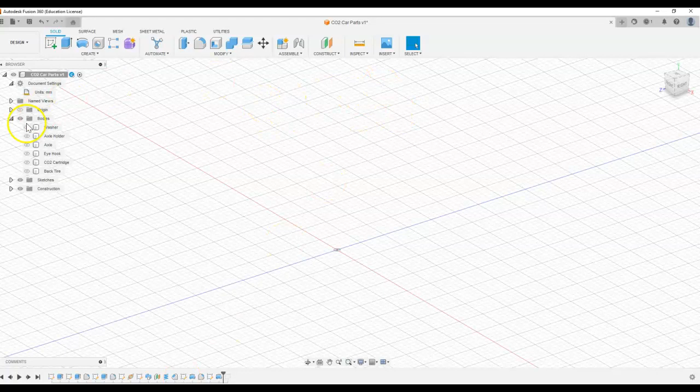So let's jump into Fusion and see how this works. If I turn my axle back on, really, because I'm not doing this with Revolve, I'll want to ensure my tire works by drawing on the front. I'm going to turn that back off, but I just wanted to make things make sense.

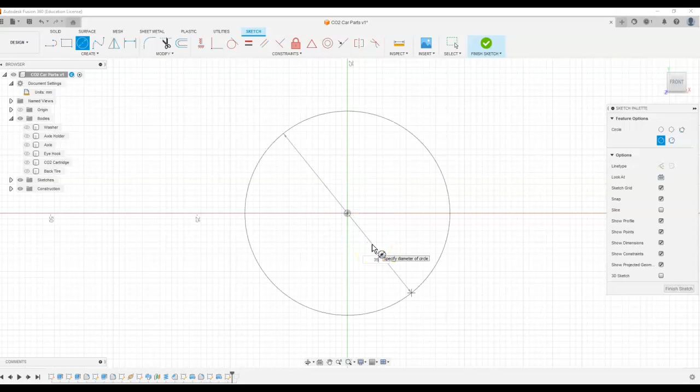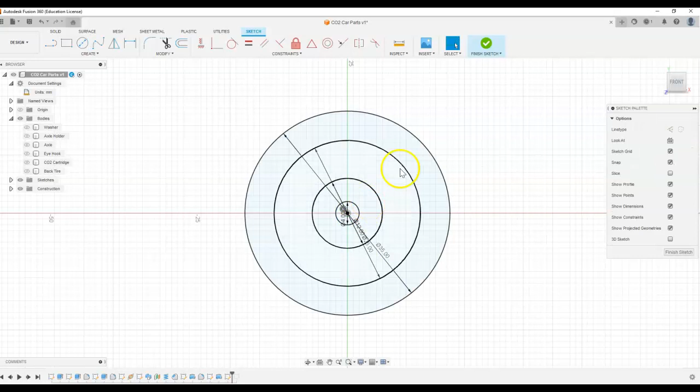To me, it makes the most sense to start with our biggest diameter. I'm going to use the shortcut C to get to our second largest, which is 25. I'll use the shortcut C to bring out 12 millimeters, and then follow up with one more at 4 millimeters. All of these concentric circles may look confusing, but if you look at the drawing, it's 35, 25, 12, 4. The only one I'm not doing yet is the 3, and that'll make sense in a moment.

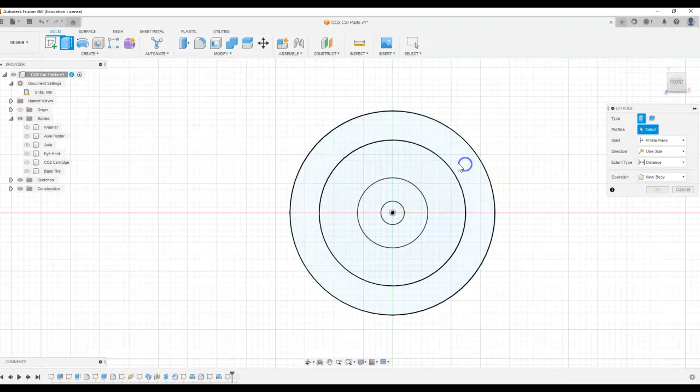All right, so how thick is this, right? If you look, we have a 5 millimeter thickness. So I'm going to pop out this piece and this piece only for right now, and we're going to do 5 millimeters. Let me look at this isometrically so you can see exactly what I'm talking about.

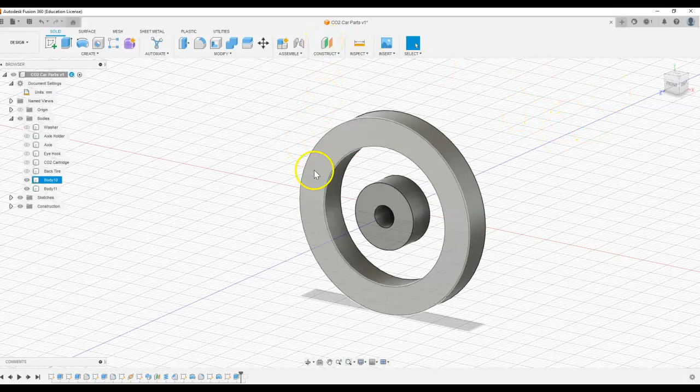So basically, the really tricky part about this wheel is the fact that we're going to need to draw 1 millimeter inside this. If we think about the sketch plane, if we write negative 1 millimeter, now we're drawing inside without actually needing to cut the part in half. That's one of the benefits of CAD, right?

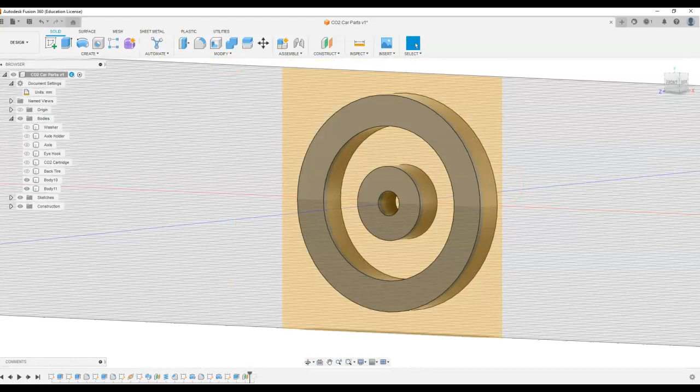So we're going to draw this piece right here, and we are going to start working on spokes. Spokes are really going to help us when we draw the support for our tire. If we look at the drawing itself, there are a few ways to do this.

I'm actually going to use a project geometry tool, and that way this piece and this piece are actually going to be connected. I may have to draw a circle later on, but if you look at the drawing dimensions, it's an angle of 35 degrees, and it says it's 5 times. That means each one of those is going to be different—there are 5 different spokes, and you'll see that every part of this is actually extruded out.

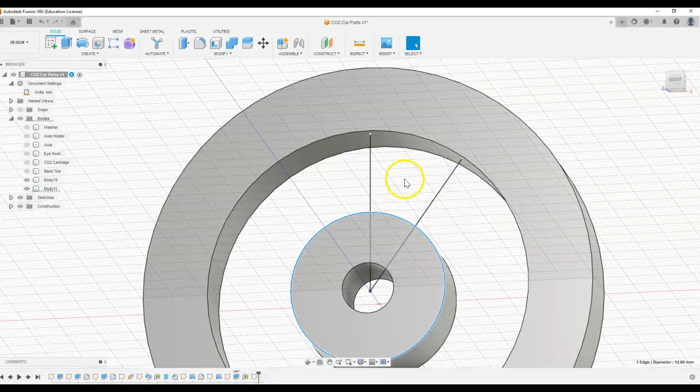So we have that part, we have that part. This is the only face that we're actually going to be popping out. So if you go to project or hit the letter P, you can actually project the same exact geometry onto this sketch. If we hit this, you'll see that I can't actually pop this piece out, right? So projection isn't perfectly working.

So if I go out here and just draw circles, the same idea is going to work. I'll have each one of those with the same dimensions. Let's check it out, see if it worked. And it does—that's great.

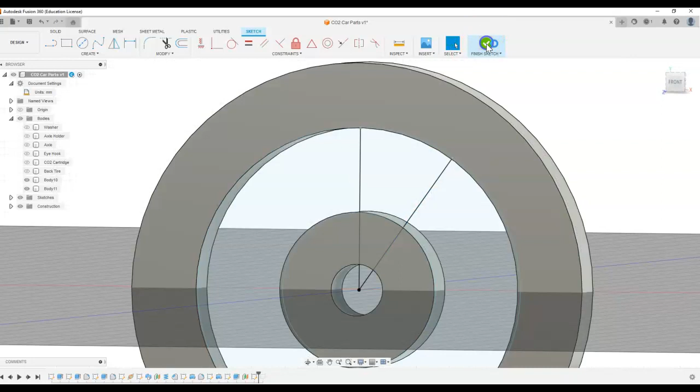All right, so if this didn't work, you wouldn't have the ability to highlight this after your sketch is available, right? So that means that I know that it works. So I'm very confident each of you could go through and draw all 5 of those. However, that's going to make your life a lot harder.

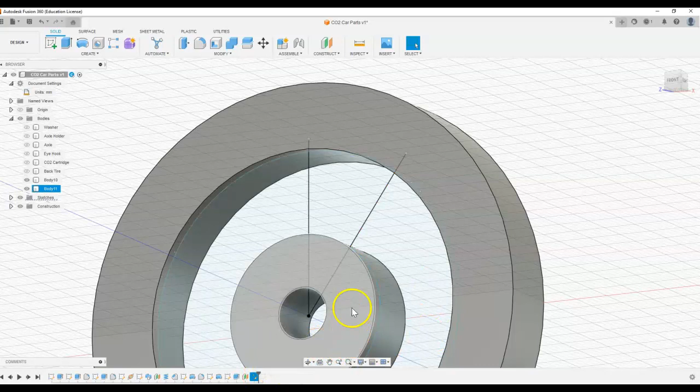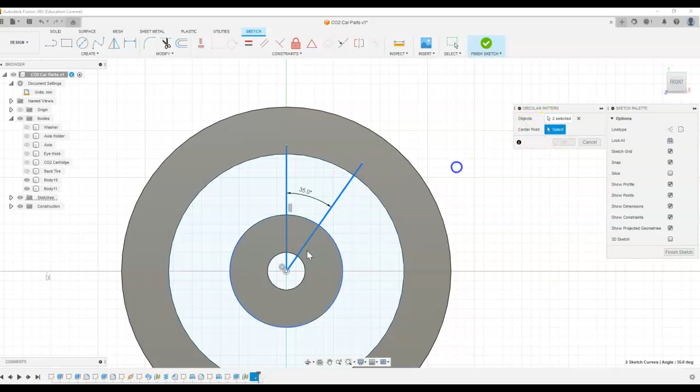So what I'm going to do is I am going to take these 2 exact lines. I'm going to click on them for a second, and I'm going to go to circular pattern. Circular pattern is a very powerful tool that's going to allow you to click objects as well as center points, right? And I can take anything that I want to and it will duplicate that pattern.

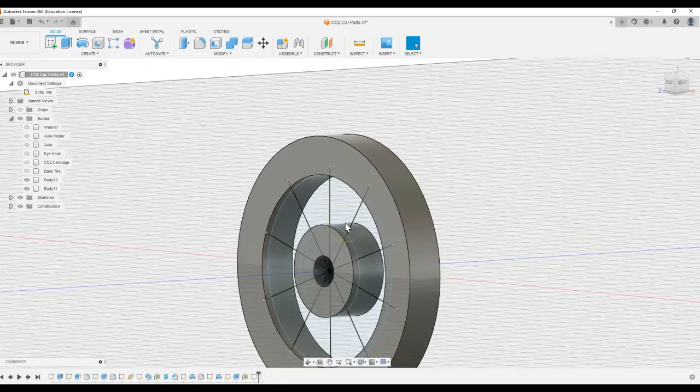So instead of us having to redraw this, I can just use math to actually redraw all of those circles, those lines. Now, when I extrude this is where it's a little bit tricky because you have to use the drawing. It says that the hole goes down 1 millimeter. Well, if the whole thing's 5 and there's a millimeter on each side, that means this is going to be a 3 millimeter extrusion.

So if I hit the letter E and I simply click every other one of those and I have a dimension of 3, it's going to seem like it's a cut. But the second I go to join, and instead of making this positive 3, I go to negative 3, now I get that geometry that I'm really looking for.

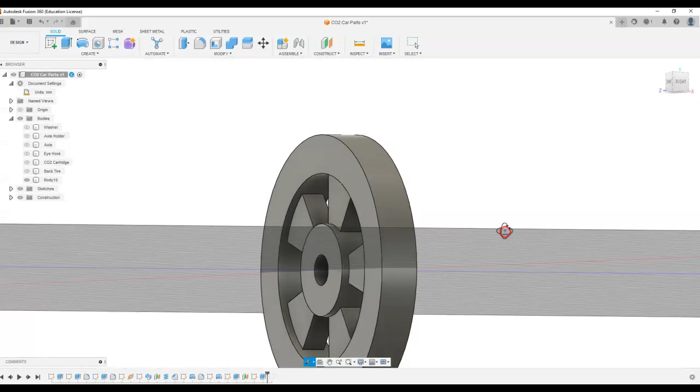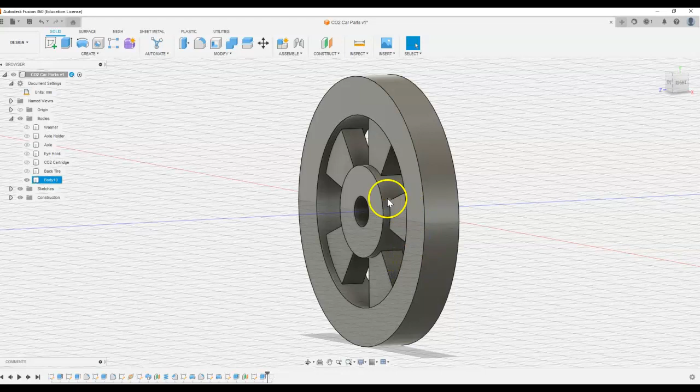Okay, so a few more steps here. Essentially, what we're trying to do is we have on the back side, we need a cap of 1 millimeter. And on the front side, we need to extrude this out. I think it's 2 millimeters, but I'm going to check the drawing right there. That's 2 millimeters, right? So right here, I'm going to draw a sketch right on the face of this.

And I am going to make this a 3 millimeter circle, and I'm going to extrude this out. And instead of doing this on one side, I'm going to make this 2 sides. So on this side, you can play the drag game. I'm going to make that 2 millimeters. And on this side, I'm going to make that 4 millimeters.

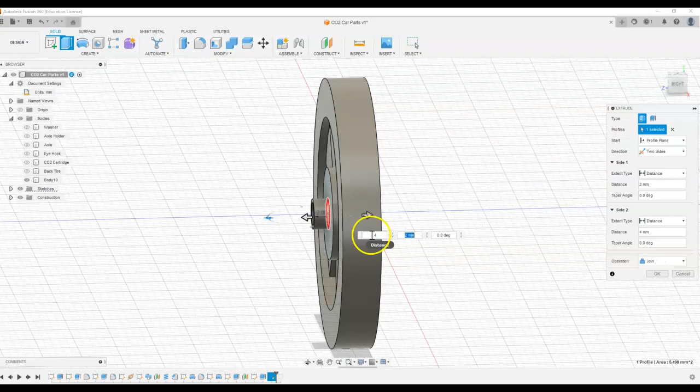5. Well, I could do that all the way through and then just extrude it out. But I think this will make my life easier when I put the end cap on. So now I have that popping out once, and this is what I mean. There's not one way to do this. You could do this so many different ways.

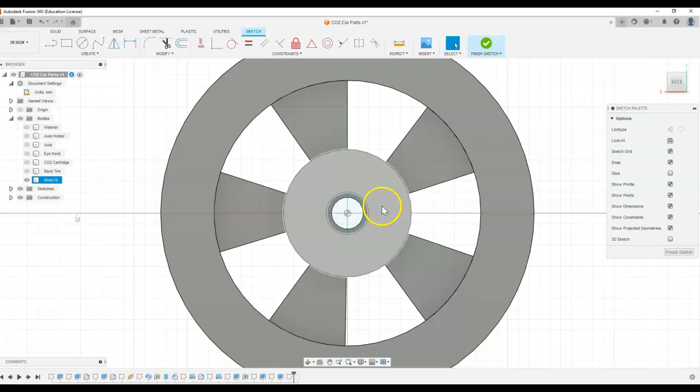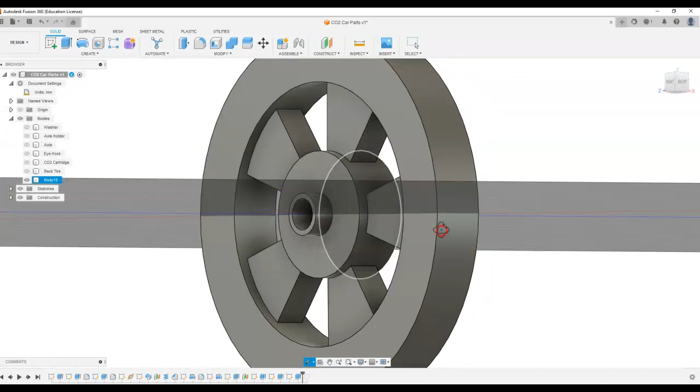I'm going to use project geometry after a sketch is created on the back of this, and then I'm just going to extrude this out. I'm just going to say, hey, I want this piece and this piece to be extruded out so that that gap is all filled in. That way I could actually put my axle inside of it. If I move that over, that looks like it's lined up, so that's great.

Turn my axle off. Now all I need to do is rename, add properties, and I am done. Front tire.

Head over to physical materials. If I look at the drawing, it's going to say ABS, so I believe that's in my favorites, so I'm just going to use ABS plastic. We could make it look perfect and paint it black if you would like, but the properties are going to be consistent right now, which is 3.6, which is absolutely fantastic.